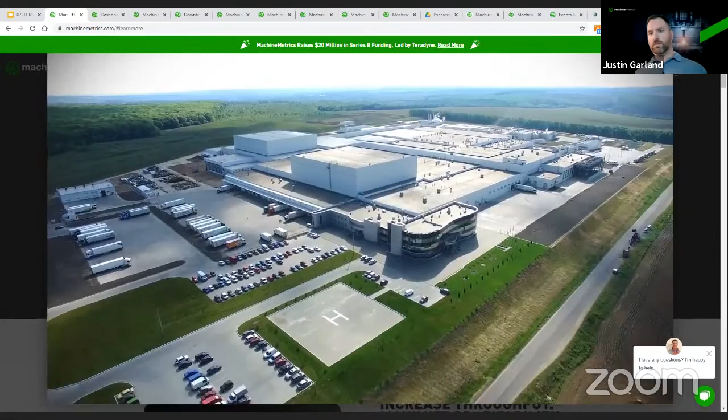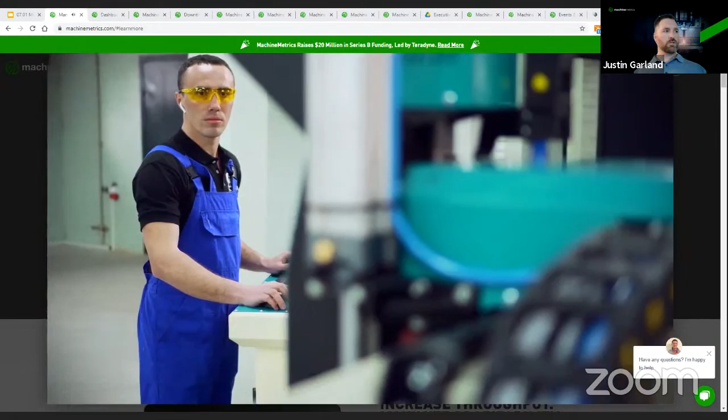Manufacturing produces more data than any other major industry in the world, yet has been slow to adopt the digital mindset transforming industries like agriculture, banking, and healthcare. Manual data collection is time-consuming, inaccurate. Operating on gut instinct alone leads to inefficiencies and poor decision-making that affect every component of the company's operation, from significant downtime to production losses.

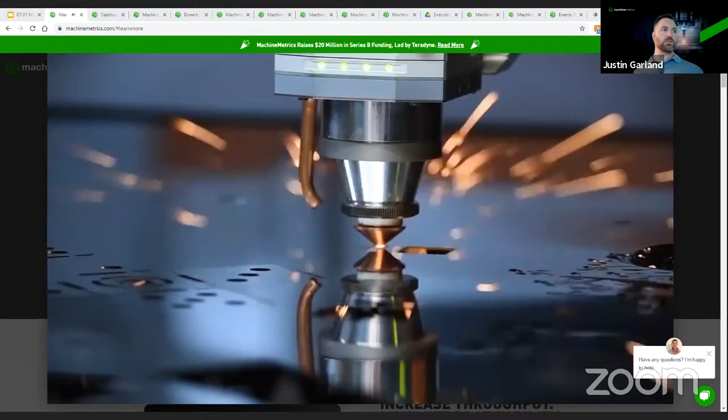We're in the age of Industry 4.0. Manufacturers need every edge they can get to stay competitive. Real-time actionable data is that edge. Your machines generate hundreds of data points every millisecond, all of which tell a story of what happened in the past, what's happening now, and what will happen next.

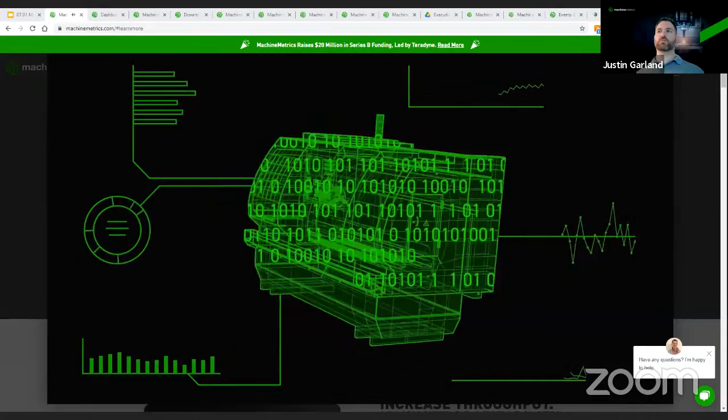It's time you harness that data and jump-start your factory's digital transformation. MachineMetrics provides an intuitive, flexible monitoring platform that easily collects data from any piece of manufacturing equipment and transforms it into powerful, actionable insights. Why does MachineMetrics succeed where so many others have failed? The key is in our ease of use, time to value. The MachineMetrics IoT platform is easy to install and implement - you'll start visualizing data in a matter of hours.

Plug-and-play edge connectivity harnesses and standardizes machine data across your entire fleet. Our intuitive, out-of-the-box apps are easy to use, drive rapid improvements in efficiency. Training is minimal. Real-time shop floor dashboards, machine production and condition monitoring, historical reporting, and automated alerts instantly enable visibility and analytics to help your team understand the big picture. Build your own apps or seamlessly connect with your current shop floor systems to easily integrate machine data across your digital factory.

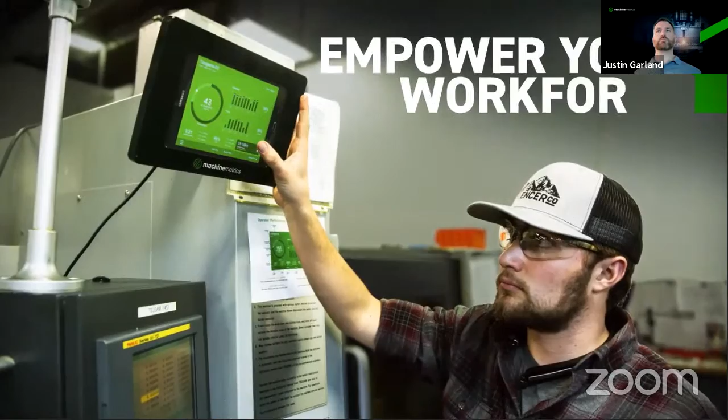MachineMetrics will help your team deliver the right information to the right person at the right time. Identify potential bottlenecks before they occur. Update cycle time standards in real time to improve pricing and scheduling. Detect anomalies and predict maintenance events before they cause downtime. Empower your workforce with step-by-step instructions to optimize processes. Enable lights-out manufacturing with remote monitoring and alarm notifications.

With MachineMetrics, any manufacturer can start leveraging their machine data immediately to drive improvements and provide the foundation for scaling data across their operations. It's time to start transforming your factory, all with the click of a button. Harness the power of machine data so it can become your competitive advantage.

All right, that was a quick overview. What I'll do now is jump into a presentation that focuses more on the details, of course.

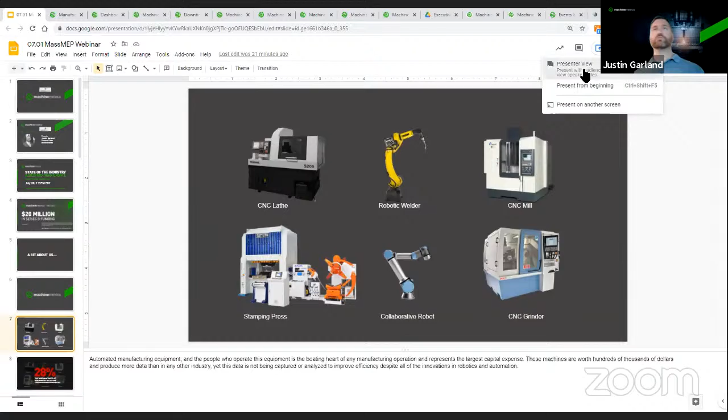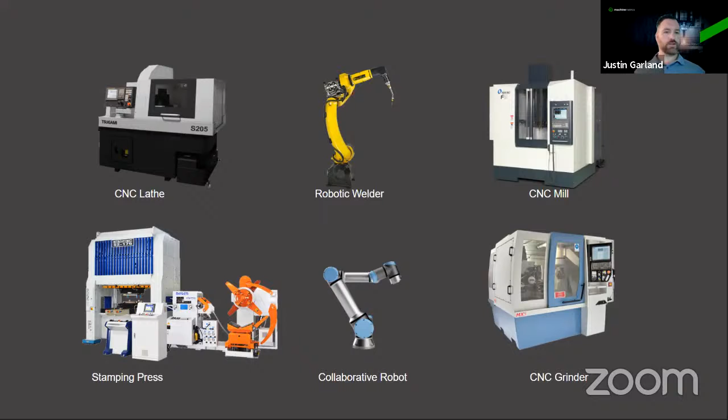MachineMetrics came together in 2015 to transform manufacturing, looking at all the automated manufacturing equipment and the people who operate it, representing the beating heart of the manufacturing operation and the largest capital expense, with machines in the range of hundreds of thousands, if not millions of dollars, producing more data than any other industry. We recognize that it's been difficult to capture that data and analyze it in a way that adds value for manufacturing organizations, despite all the innovations around automation and robotics.

Today, manufacturing is still consumed by so many manual processes that lead to inefficiencies. We have a benchmarking report that states the starting utilization when we onboard our customers is below 30%, and that number is still valid today through 2021. So the question is, how do you take the opportunity to improve your business?

Is it IoT? Is it Industry 4.0? Is that really the silver bullet that's going to solve all your problems? The reality is that the implementation of IoT solutions more often than not fails, and the reasons are due to the complexities of connecting diverse equipment. A lot of times there's years of custom development and integration required before you can obtain any initial value. So in order to reach that digital factory, we know the process has to be easier to get there.

That's really why we built MachineMetrics. We're manufacturing's industrial IoT platform built specifically for machines. The whole concept is that we make it very easy to capture and transform data from manufacturing equipment, and make that data actionable through increased visibility, predictive analytics, and configurable workflows. The whole goal is to automate the operation and the processes around machines. We look at it as building the operating system for the autonomous factory.

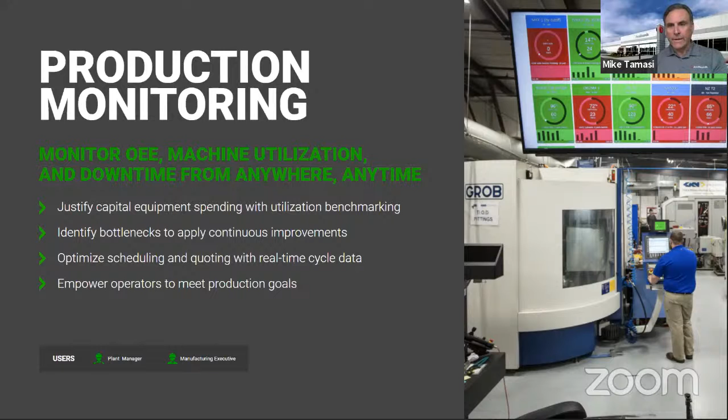Now it's instant. So all that non-value added activity, and by the way, we were getting data a day later or two days later. It's been a huge, huge difference for us to have access to that information real time to make better decisions.

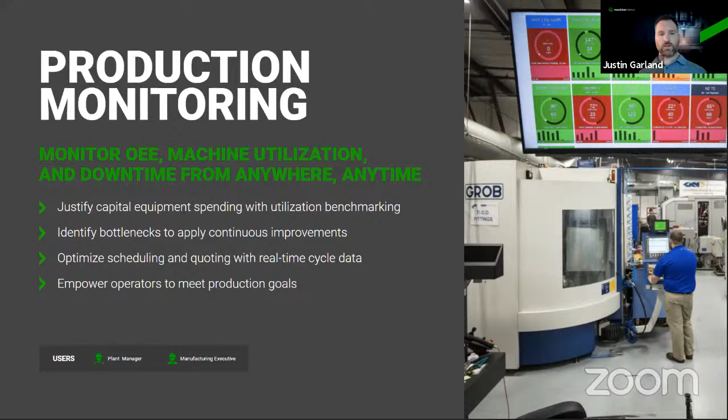That's great. And that's a common story across so many of the customers we work with, that true transformation to that digital factory. So going above and beyond the impact we have on the shop floor with regard to productivity, we also have a condition monitoring side to our product that allows folks like manufacturing engineers to understand root cause of problems, and they can access that data remotely across all your machine conditions, and they can see that historically or in real time.

Obviously, with the last year of the pandemic, having remote access to that data is more important than ever. Going forward, we can also set up workflows so that maintenance managers can be notified, let's say if a machine signals a critical alarm or a sensor value exceeds a certain threshold.

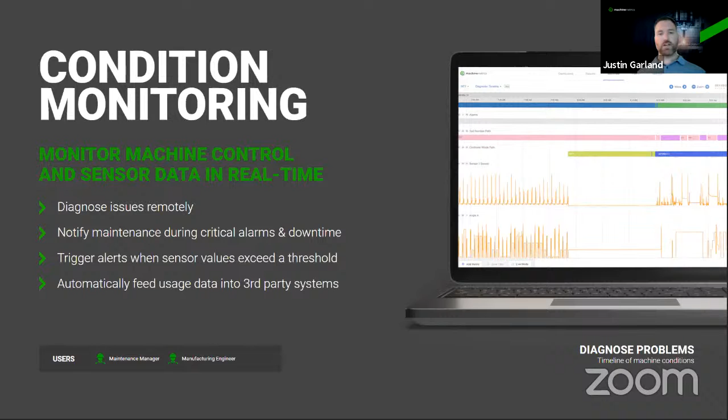And then what we can even do is feed that data into a third-party system like a CMMS to automate maintenance workflows. So I'll talk about extending the capabilities of MachineMetrics into other systems. That's one of the big areas.

One of the advanced capabilities we have on the machine health side is our ability to capture data at a high frequency, and we could do that without any additional sensors on some machines. Some machines may require those sensors, but we can detect patterns in the data that predict problems before they occur on the machine - looking at things like tool failures and defects.

What we do is deploy an algorithm to the edge to help control that machine. We have a handful of customers who are saving a lot of money every month by stopping machines before making bad parts. That's really the ultimate level to get to when we talk about the autonomous factory. And what we can do is actually deploy those applications on our edge platform at scale.

We have another customer example, Avalign Technologies. They rolled out MachineMetrics, and within a few months, they did the same thing as Mike - looking at a smaller group of machines, focusing on a specific area. They quickly realized the impact and scaled to the rest of the machine fleet.

Within the first year, the impact that they had was in the millions of dollars, and some of the same type of impact that Mike talked about too, with the increase in OEE, reduction of downtime, and they were really able to have a huge impact in increasing their capacity and throughput. So when you think about the financial opportunity to improve your operations and your profitability, the sky is really the limit in terms of what opportunities are out there.

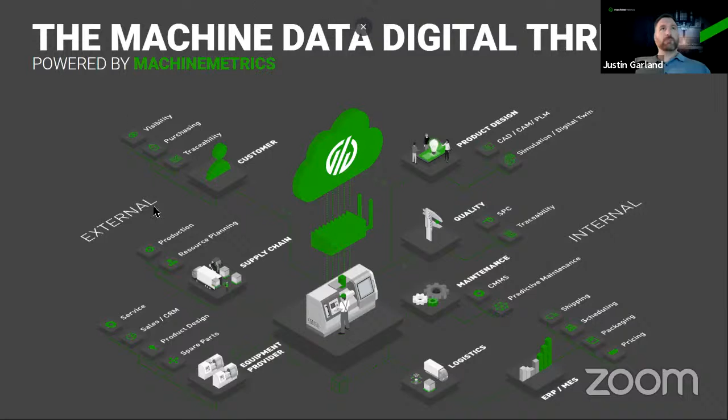What I'm going to do now is switch gears to the platform, and I'll run through a few of the basics so that viewers can see the tools that customers like Mike use on a daily basis. A few things to focus on initially.

Most of our customers focus on utilization to start. We'll baseline utilization for them, and we'll allow them to set goals. That's really what's going to drive the ability to improve their operations.

We also have parts goal and downtime. Those will give you different levels of performance visibility, being able to track not only if our machines are running as often as we'd like, but are they hitting our productivity goals?